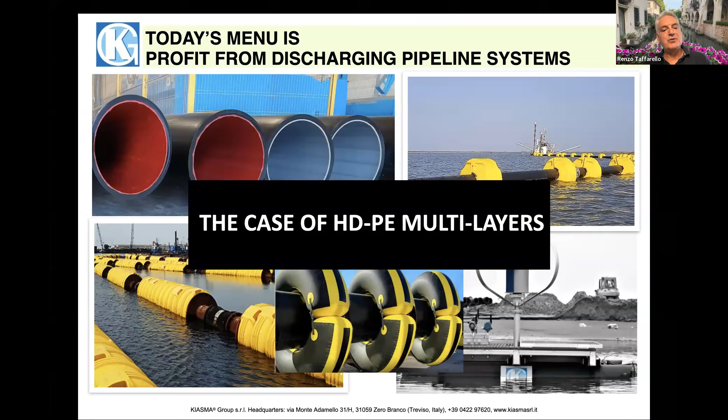What I'm going to tell you is we are experts in pipelines made with material like HDPE. It's our bread and butter. And that's the major findings we have about using this type of technology and materials.

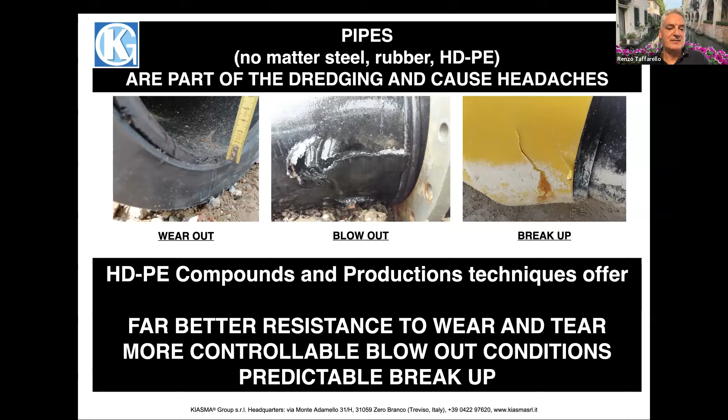What we were a little bit astonished by over the years is the fact that everything is getting smarter. Everybody in every field, every production device, is making everything more intelligent. And it seems that pipe for dredging is not getting so smart. So because this is our industry and our field of expertise, we started to look not just at the pipelines and the way they are manufactured and used, but also at how we can achieve better performance in terms of wear, controlling blowout, and different performance in terms of breakup of the material.

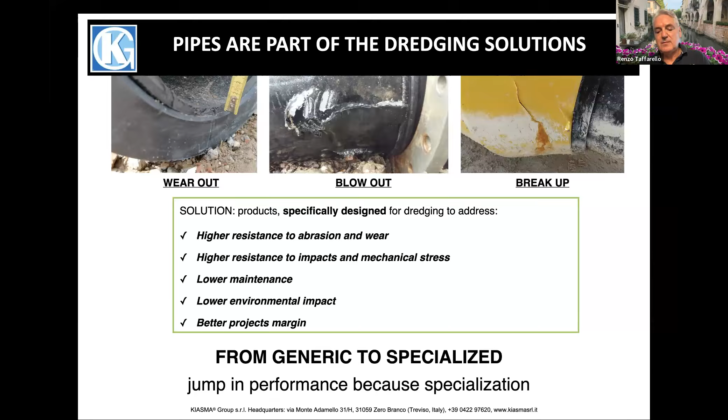And we found, and that is the main aim of my speech today, that we can achieve a lot of good results, performance, and economic benefits if we go from generic to specialized products for the dredging industry. What I would like you to take away at the end of this hour of presentation is that discharging pipeline is a factor for improving profit. And the profit comes from specialized solutions. Profit and sustainability go together very well.

This is not a commercial pitch. What we are going to share with you is our findings from our technical research and development department, working in the field with customers and projects, but also with the university. As Robert mentioned, I am working with the University of Padova, which is nearby Venice.

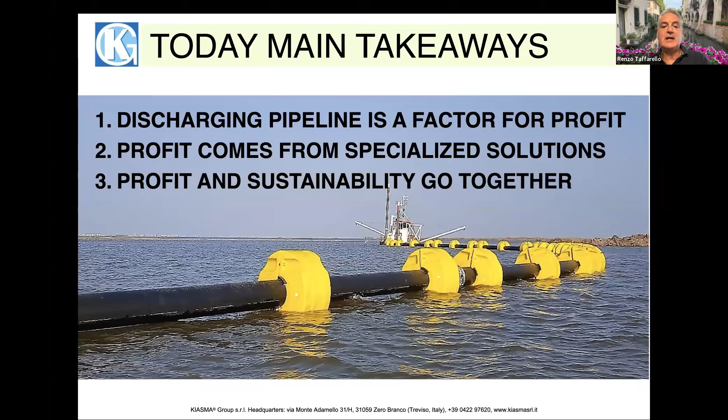We are located there, basically, and also in Ca' Foscari, which is the University of Venice itself. So we used also the university, we engaged the university for this type of research.

And helping us in understanding what we are getting from our research. In order to take you in this field, what I'm going to tell you today is a very brief crash course on dredging technology and the production and economics behind that. It's a way to put everything all together, because one of the main findings for us is that the result is not just looking at the single components in the pipeline, but looking at the overall system.

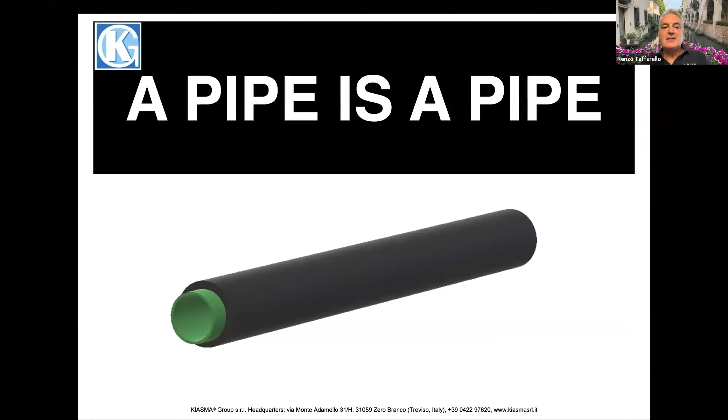So I'm going to take you into that today. We usually start thinking that a pipe is a pipe, but for people working like us in this field, the pipe is a system. The sketch on the screen came up from our brainstorming years ago, and we found out a lot of things, components and technologies that go into the system. They affect the dynamics, the mechanics, and the economics of the whole performance, not only of the pipeline, but of the overall dredging project.

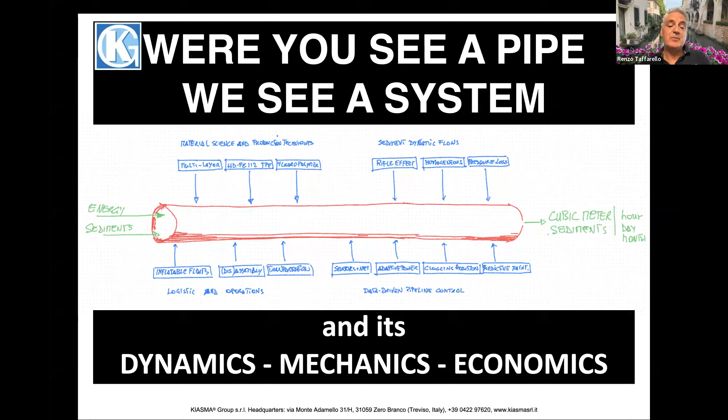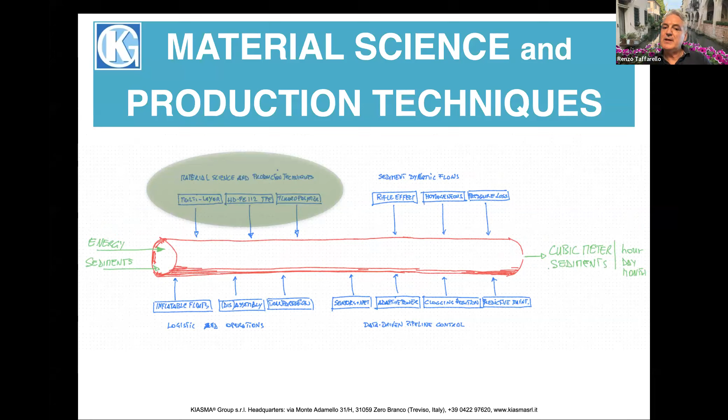So let me take you step by step. The first one is about material science and the connected production techniques that allow very astonishing results. We are talking about HDPE-based materials, but you will see now that we can improve this a lot by adding compounds and many other things. This is the type of product we are working on, we worked on, and is currently in the market, but is not very well known for its astonishing performance.

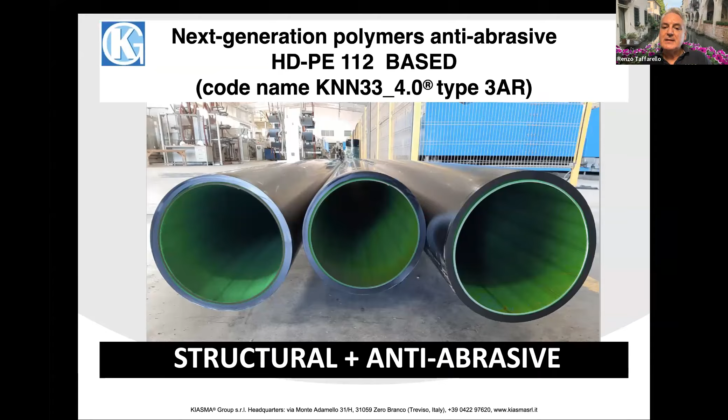It is a product made, a multi-layer product made with different types of materials. Some of them are not really compatible, and we found out the way to make them compatible. Let me just make sure we hit the important point.

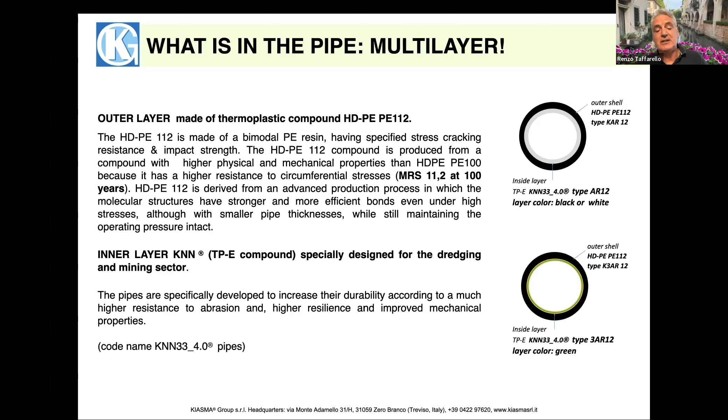This pipe is a multi-layer pipe. It has an outer layer made with HDPE. And actually, we are not using the traditional PE100, but the PE112, which is, as you will see shortly, a very different animal than the PE100. The inner layer is a TPE, an elastomeric compound designed especially for dredging applications and mining as well.

Let me explain a little bit more. During the years, you have seen in the market pipe made with HDPE, PE80, and then PE100, which improved a lot of the performance. We know that the blowout of the pipeline is a real concern, so it improved quite a lot from the PE80 to the PE100.

But the biggest jump in performance comes with the PE112. You see in the sketch the molecular structure and the difference between the PE80, PE100, and PE112. That makes the pipe made with PE112 much more resistant to pressure, and you can also play with the pressure and thickness of the pipe according to your need. That gives some advantages in terms of price and cost in production.

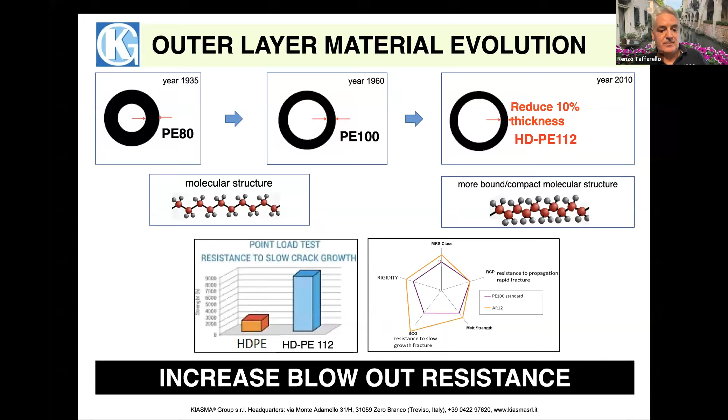You see the abrasion loss having the material go through the pipe. It goes dramatically down from 152 cubic millimeters to 48 cubic millimeters. It means that awareness of the thickness of the pipe has improved the performance, and basically the same thickness lasts three times more just because we added this inner layer of material.

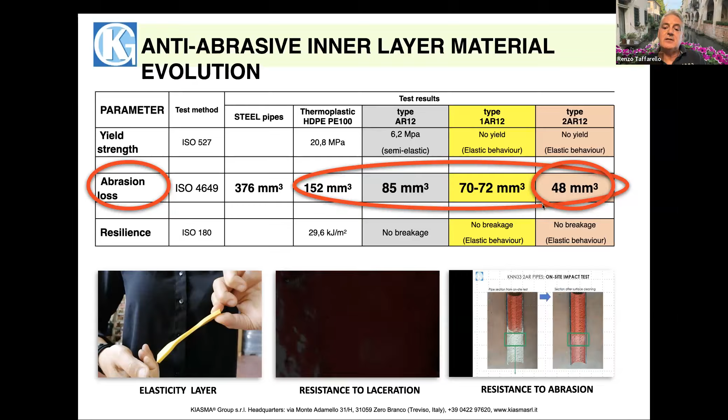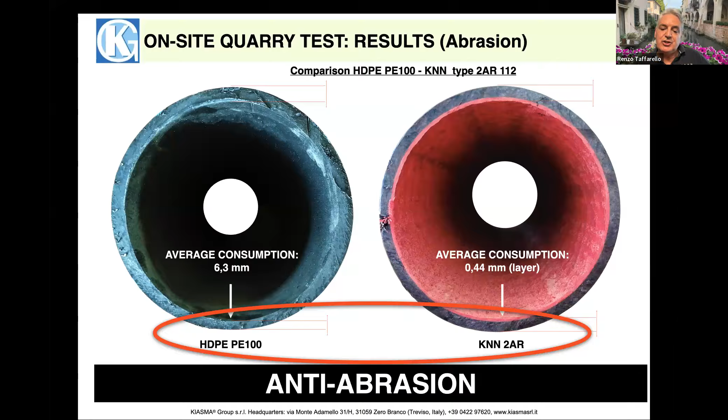So this material has a very big effect on anti-abrasion, and it improves a lot the performance of the pipe. And that is what comes out from our production site. It's co-extruded, and it has a very significant resistance to abrasion.

But also we found out that we could add other additives into the inner layer to have a friction-reducing effect, and this is another interesting fact. So we could put into the TPE compound, which is in the inner layers, something like the PTFE family type of material, which acts like a kind of lubricant. PTFE is like Teflon-based stuff.

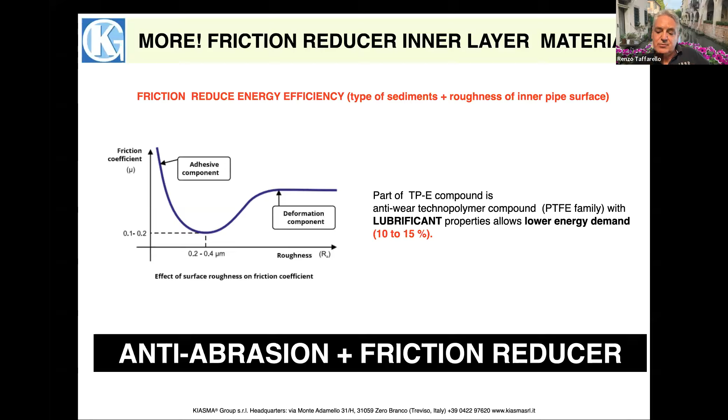Again, the trick or the difficulty was to make sure that you can co-extrude at the same time and chemically bond the HDPE material with the elastomeric and the Teflon-like material too. In such a way, we could have the outer layer, which is the structural part made in HDPE, and then we can have together the effect of anti-abrasion due to the elastomeric part and the friction reducer as the other component in the compound.

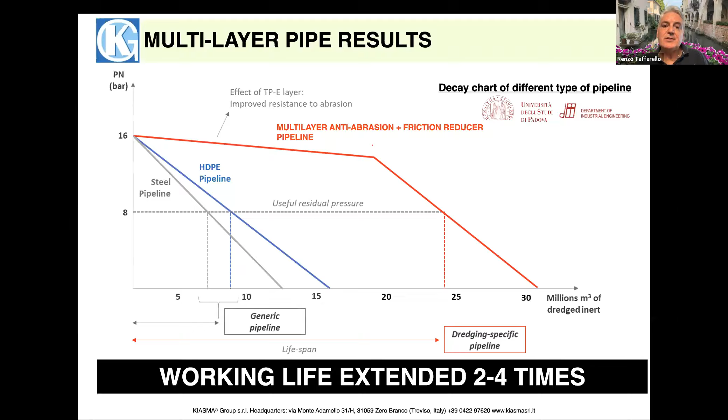The first part of the slope is due to the inner layer, which is very resistant to abrasion. So a pipe like this, made specifically for dredging operations, has a very significant impact on the operations and, of course, on the profit of the operation.

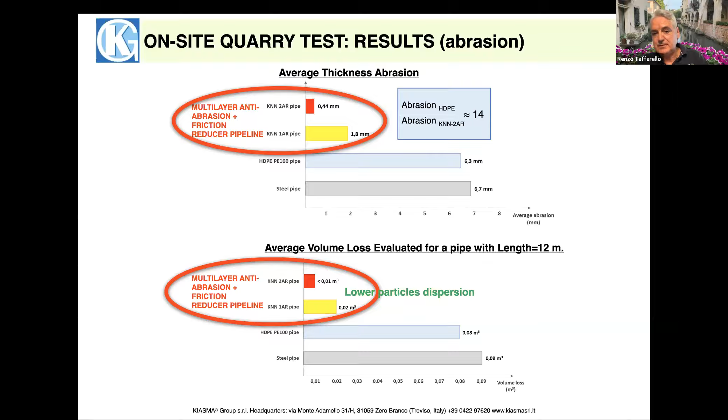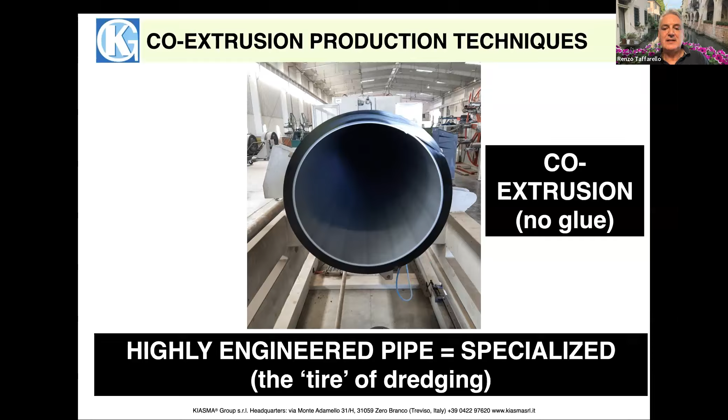Just for this part, I wanted to conclude to say that highly engineered pipe means that they are specialized for dredging. And we joke to say that this type of pipe is like the tire for the dredging. The tire for cars, this pipe is the tire for dredging, because it's so highly engineered that it can achieve this type of performance.

And the takeaway from this first part of my presentation is that there is a real increase of the resistance to the pressure. There is a very good anti-abrasion that extends the pipe life 2 to 4 times. And due to the fact that the material flows better, we can also have savings in energy. So again, another factor that increases the profit of the operation.

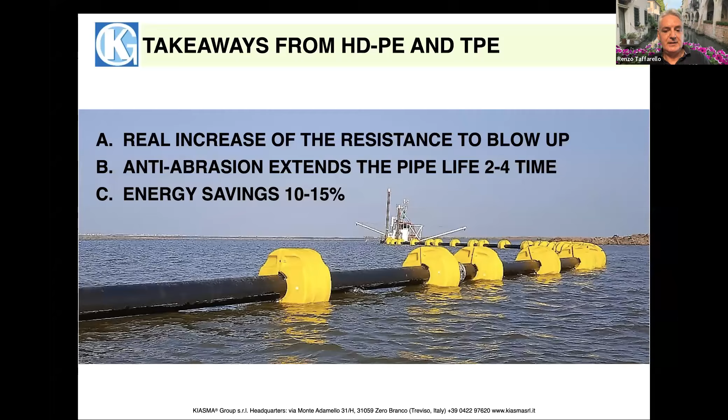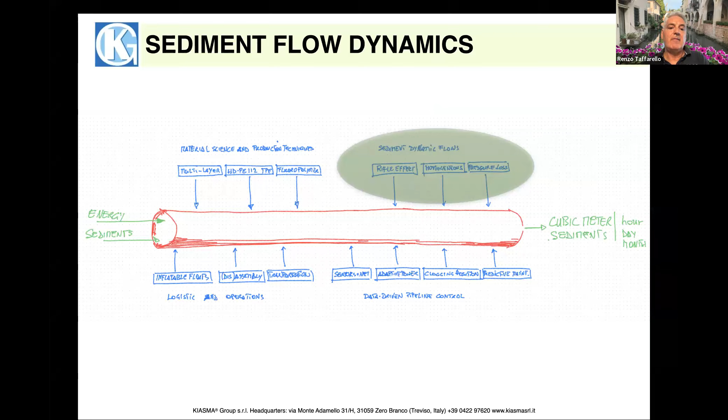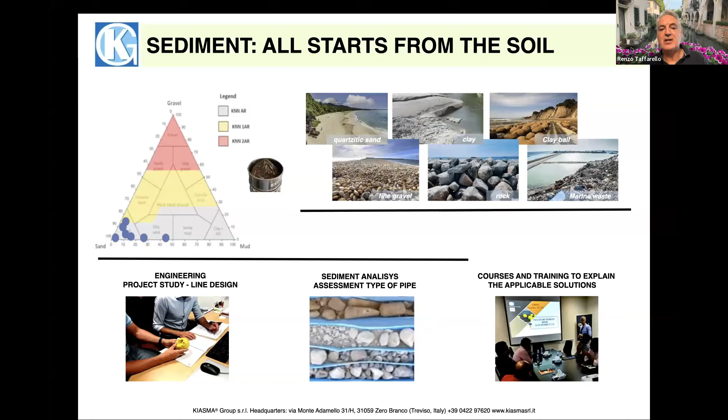Let me take you to another area of the system of a pipeline, which is the sediment flow dynamics. Here we tested and know how the soil, the sediments, behave and how they affect the pipe. We worked on several projects all over the world in different types of environments, so we had the chance to accumulate a lot of knowledge about sediments.

We know that, and it's common knowledge but not easy to apply, if we are able to make the sediment dance, we call it, or have a rifle effect where the sediment can flow in a kind of propeller way inside the pipe, you can have a lot of better performance in terms of throughput, and the fact that the sediment is not going into the bottom part of the pipe.

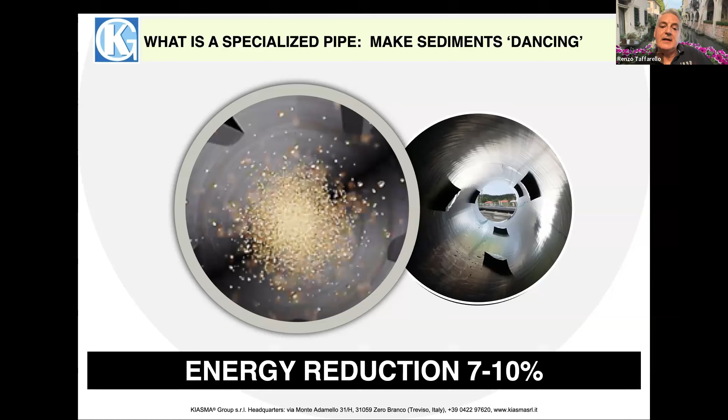But I wanted to point out again that because the sediment flows easier into the pipe compared to the other situation, you can have an energy reduction. And from our first test done in the quarry, it's about 7-10% of energy reduction at the pump effort in order to push the material through the pipe.

That is from our analysis, and we found out that the trick is, if we want to have a flow as homogeneous as possible into the section of the pipe, we needed to include, you see into the bottom right, the inner part of the pipe, a kind of fins or winglets, we call it. The difficult part for us was to study the geometry and the position and the way they should be located into the pipe.

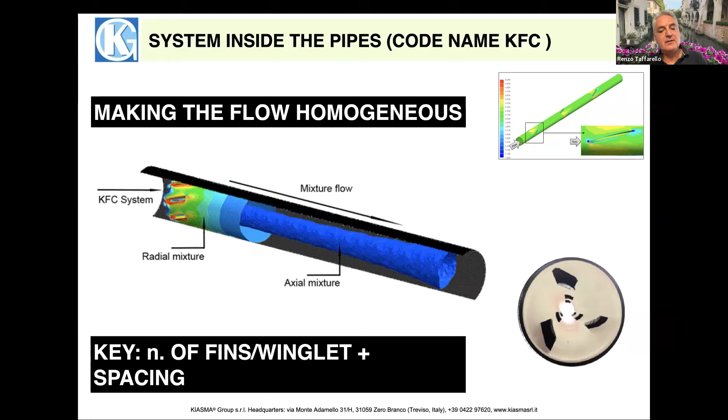We found out some optimal solution, working both in the analysis with computers and from the field. This is a very important result for us, because we found out the system of geometrical parameters in order to place the proper winglet inside the pipe. One thing I wanted to point out is that with HDPE-based pipe, you can do that pretty easily. With other types of material, it's quite difficult or impossible, or it will cost so much.

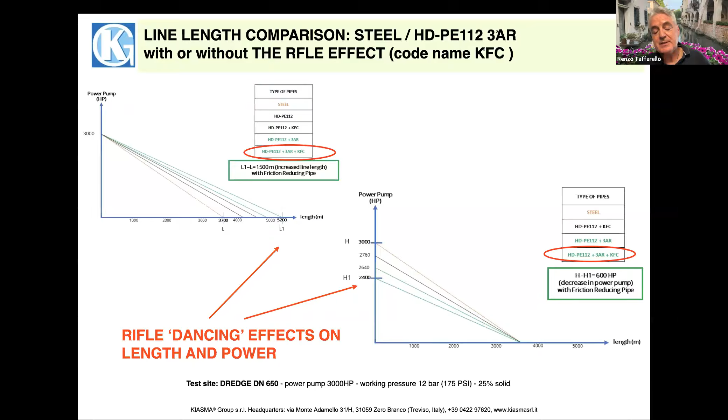Just to share with you some results of our analysis and comparisons from the field. We have two types of graphs here: the power pump, which is fixed, and the length of material pushed through. As you see in the red circles, the pipe that we made with this rifle effect—in our internal code, the name is KFC, flow control systems—the material moves quite farther than the other pipe without the rifle system. Or vice versa, the other graph shows you can lower the power pump at the pump point in order to reach the same distance. So you have benefits about that.

You have a reduction of abrasion, less pressure loss, and in some way you increase productivity at the end of the pipe. You have more material, and combining this, you also have lower CO2 emissions, and in fact a reduction of microplastics. So this is an effect that is good for the environment, and sustainability is enhanced from this point of view.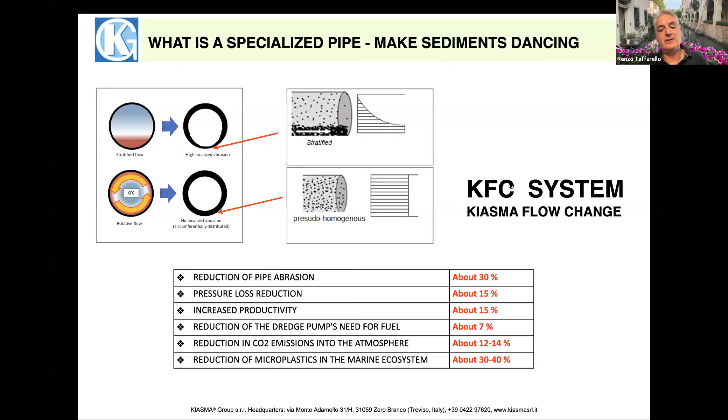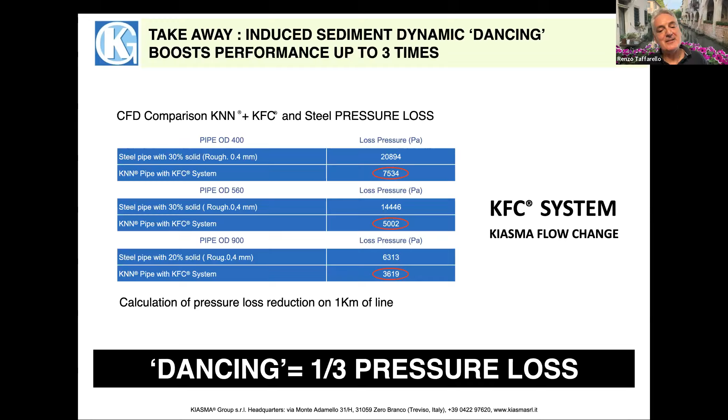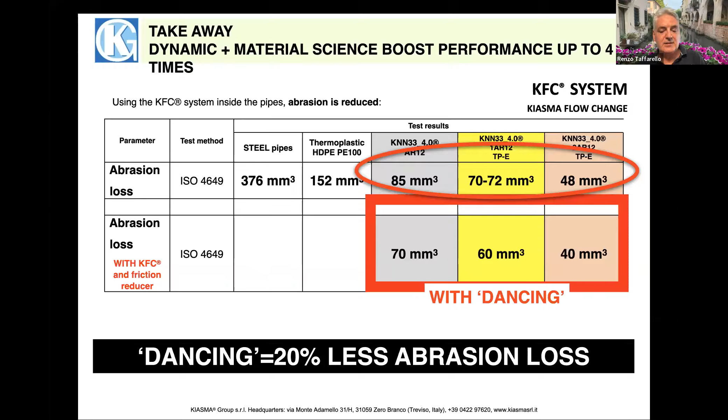Here we show that we have measured the pressure loss, and we found out that we have one third less pressure loss compared to the traditional system without the dancing system of sediment. We also have an improvement in terms of abrasion and loss of thickness into the pipe. Having the material go in a rifle way, with a more homogeneous section of material going through the pipe, we have another 20% increase in the performance of the thickness. In our best case we have 48 cubic millimeters of abrasion, and with the rifle effect we are able to achieve roughly 40 cubic millimeters of material. So it's good for the projects.

The takeaway for you is that, given the fact that the pipeline performs this way, depending on the cubic meters you have to produce, you probably do not need to rotate the pipeline. And if you consider that anytime you have to stop the dredge production in order to rotate the pipeline, that gives you quite a good improvement in terms of productivity and, of course, in terms of profit.

These kinds of systems from our production come with some increase in cost and price, of course, but the cost is about 5 to 10% more if you are including the winglets inside the pipeline, made of course in HDPE-based material. So that is an interesting result too, in terms of using the proper materials for dredging and discharging pipeline systems.

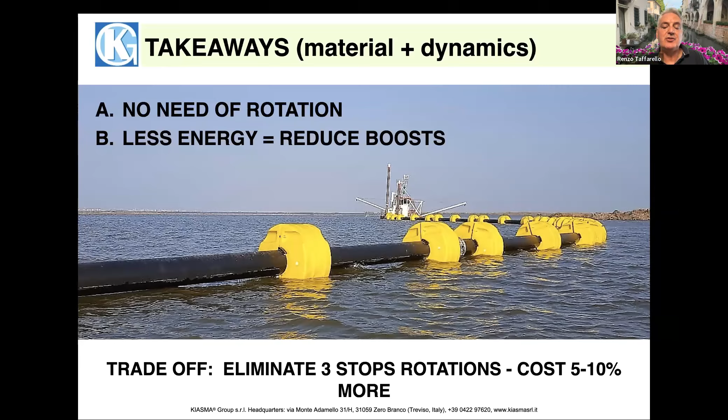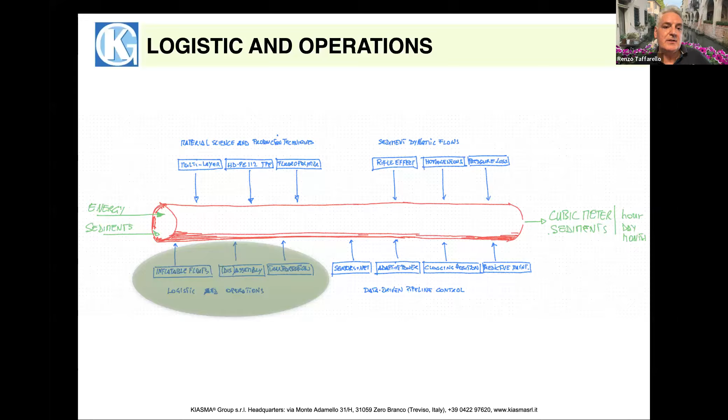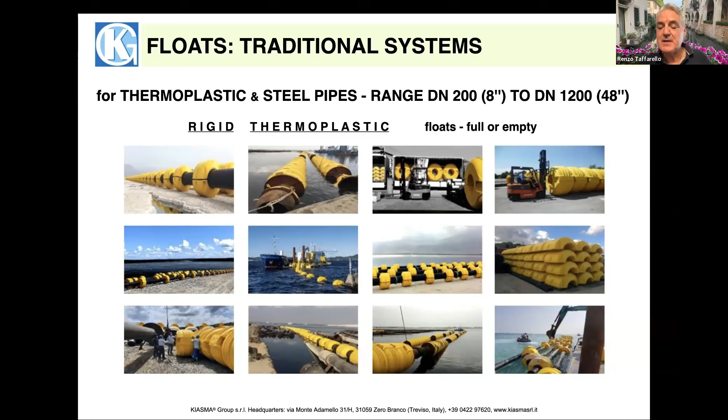Let me take you to the third area of improvement: the floats. Being so close to our customers, we saw the difficulties of operation related to the floats. Floats are rigid, thermoplastic made, and can be full of polyurethane or foam, or empty. But at the end of the day, you need to assemble and disassemble them, and there's a lot of activity going on, especially in the open sea sometimes. So we decided to try a different approach.

Which is to make the floats inflatable, in order to reach very important results in terms of operational efficiency. You can easily imagine how this type of improvement affects your operation. We found out that we could use military grade material to make the floats inflatable and resistant to impacts, punctures, and so on.

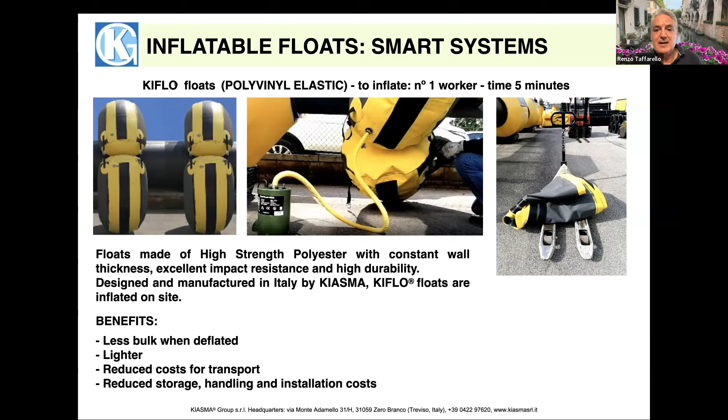This type of product is inflatable in a few minutes and deflatable in a few minutes, and can be put around the pipe very easily. So if you have to assemble or disassemble, it's a matter of minutes, and you can load a lot of these floats, up to 300 of them in a container. So it makes a lot of sense when you have to move lines or put your floats in a different place. There are a lot of savings also on this.

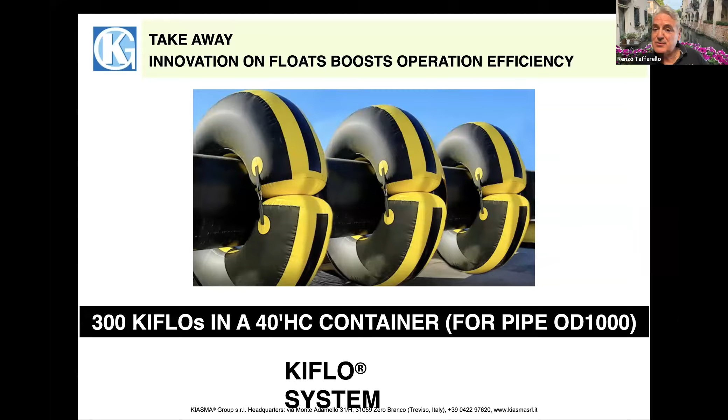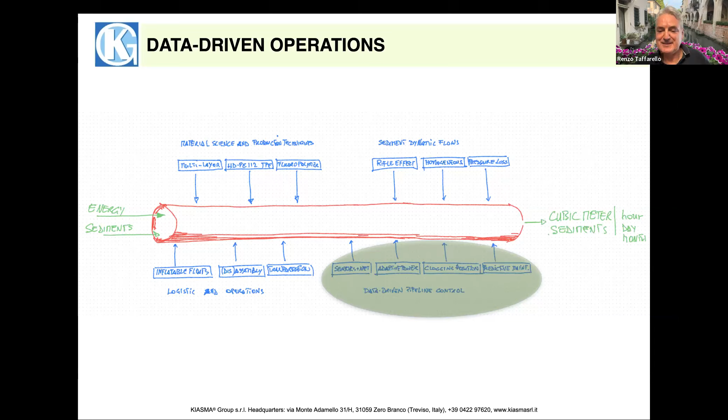Finally, let me take you to the 4 areas of improvement, which is currently one of the latest parts of our research and development, and we already have some evidence of that. It's about making everything data-driven. It's the mantra of these days: having a lot of information about what's going on in your operations and your devices, and making sure you can use it for improving efficiency, making decisions, or predicting what could happen. What we have done is introduce sensors along the pipeline.

It's not an easy job. We teamed up with sensor companies, actually our partner is an American company, and we put in every 200 meters a section of the pipe with a lot of sensors. You see pressure, thickness, temperature, weight of the material that goes through, and the turbidimeter.

For us, it's just a matter of installing these sensors in a very specific section. The problem we found out, and I want to share with you, is that we need to power up these sensors, and also the network necessary to send the data back to the dredge, and eventually back to the office.

The solution we found is to adopt a kind of highly specialized pontoon where we can allocate the sensor section of the pipe together with photovoltaics or wind propellers that help provide the energy for powering up the data transmission. The data transmission is made through a kind of mesh data net that helps the data jump from one section to another up to the dredge computers, and from there wherever you need it.

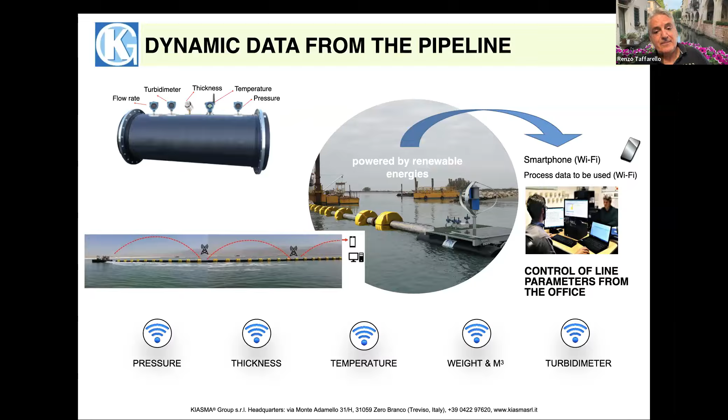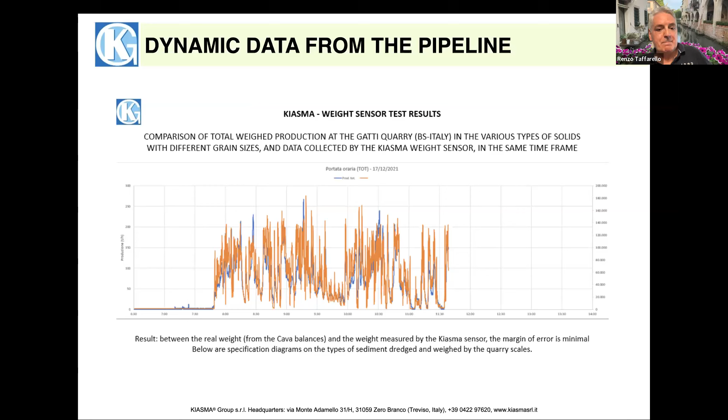So it means that in real time you can have information about what's going on in the dredging pipeline. This is just to show you a graph with two colors: one is the weight measured at the end of the line, and the other is the weight estimated through our sensor. You see they are pretty much the same, so it's a good system to consider.

The thing is you can connect all this data to the dredging operation, to the dredge pump, and create a kind of adaptive system for managing the power of the pump. That helps you save energy and fuel.

The other thing is having these sensors around every 200 meters. If there is a clogging, you immediately identify the section of the pipe where it occurred with a precision of 200 meters. In open seas or during operation, this is quite an interesting opportunity, because over time we saw that without these systems, when there is a clog, you have to go along the whole line to check where it is.

Besides that, having information about the thickness and all the other parameters of the pipe lets you plan maintenance and operation to make sure your pipeline works in proper condition, which is another important benefit from that.

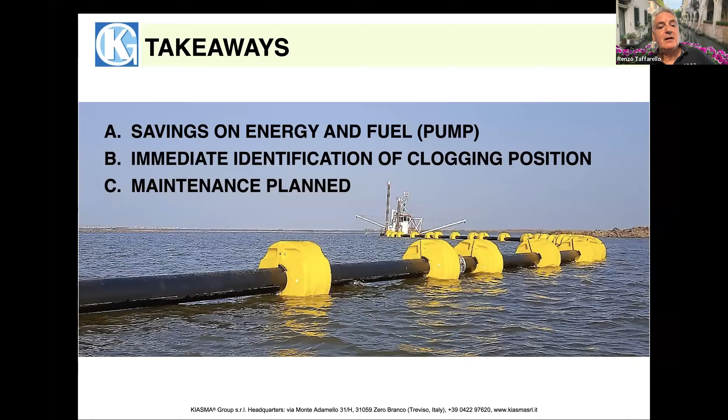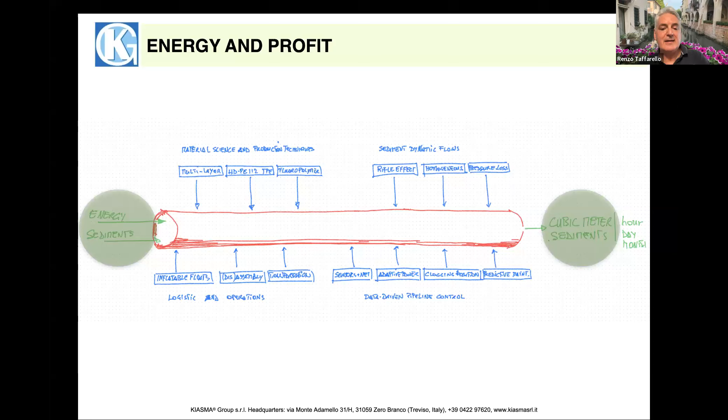Finally, I'll try to wrap up everything from an energy point of view. The pipeline systems have fuel savings—don't get me wrong, we saw these benefits, but benefits in energy and fuel savings are not easy to combine together. We are in the middle of that, and we know it's not an easy statement to say you save money, fuel, or energy. But there is a real benefit that we are trying to analyze properly and provide good evidence for.

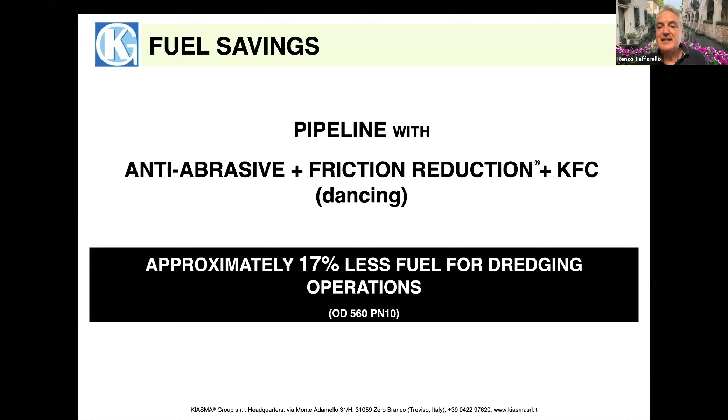What I can say is that a pipeline system with all these features, due to the material and the innovation in the way it's produced, including the rifling effects, etc., has an impact on fuel use. We saw sometimes 17% savings in fuel for the same type of operations. Of course, this statement isn't valid for everybody—we made tests in our test field with a pipeline of 560 millimeters diameter and PN10. That's interesting; in any case, we found there is real fuel saving in that.

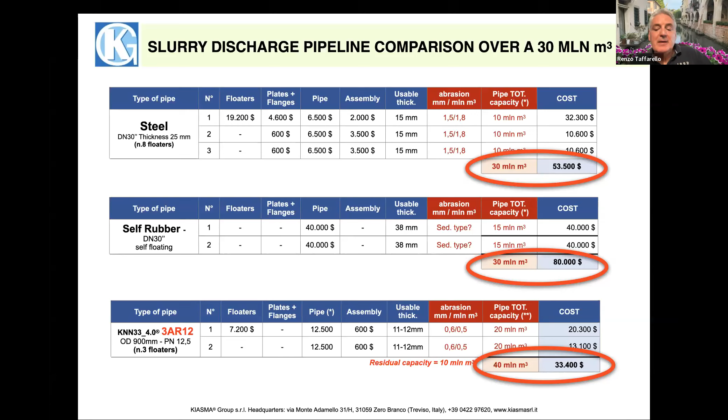So there are benefits on that. Having a specialized product for the dredging application makes sense. That's our main share with you.

In the end, the takeaway I'd like you to consider is that discharge pipeline is a real factor for profit if made properly. And the profit comes from specialized solutions, not just a generic solution. The other interesting thing is that profit and sustainability go very well together.

If we sum up all these things, how much will this cost to put in place? Let me give you my final remarks. The cost is more related, as far as we see, to changing habits and procedures. It requires new teamwork to properly consider all the advantages you want to achieve using the proper solution, and this affects the costing, planning, purchasing, and operation departments of the company. We saw that the best results come when all these people work very closely together from the beginning.

From an economic point of view, you need to consider that having a specialized solution costs more. From our perspective and production, the costs are 10-20% more, but because they last very long, they can usually be considered an asset, not just a consumable. If you treat it as an asset, you can allocate the cost according to amortization, so the overall accounting of the project improves in terms of margin. But this depends on how you manage your accounting and how you consider this. However, the technology allows you to have this long-lasting and high-performance discharging pipeline.

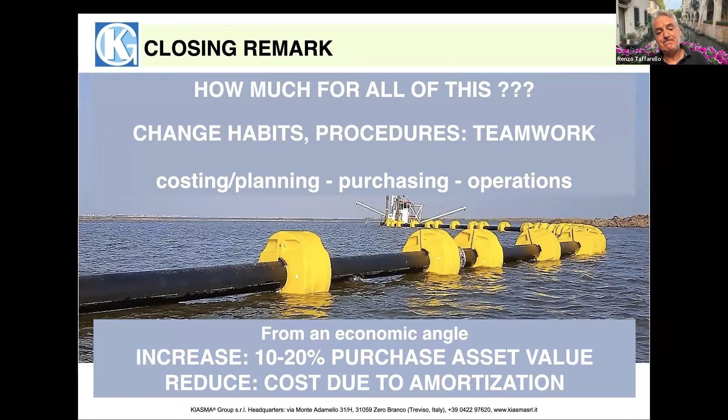That's all, and we are happy to share these results with you. We are a company, and you'll see in my presentation there are some code names referring to the product, but we know it's good to share and discuss together how to use better technology, materials, and improvements. If we work well together, it's good for everybody—it's a win-win situation in our experience. Thank you.